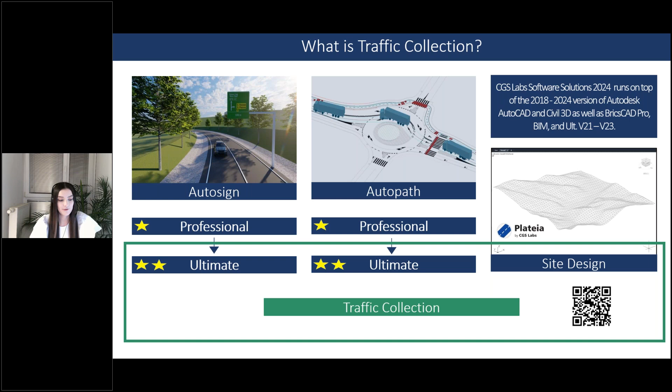First, we will take a look at site design. Site design includes quick site modeling features, earthwork calculations, utility design, and productivity tools to speed up project delivery. It is ideal for rapid conceptual projects, solution testing projects, detailed design, and earthwork projects, including volume calculations, grading, and more. Today, we don't have enough time to go through all the tools, so I will highlight only a few functionalities that I think are interesting for you.

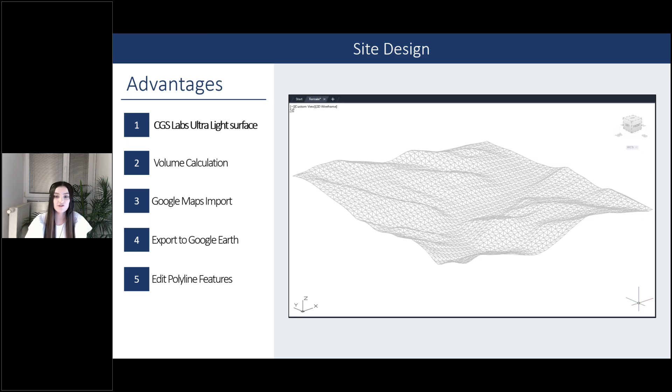So the first one is Ultralight Surface. This command allows us to create a digital terrain model based on points that takes up very little space, ensuring high performance in drawing, even when working on a large terrain. Then the next tool that greatly simplifies your work and saves you a lot of time is Google Maps Import, with which you can import a raster image and terrain with just a few clicks. So in the program, you run the Google Maps Import command and then write down the location. In our case, Wellington, and then we zoom in to find an appropriate area.

Okay, when we find the area, we can check the box on import raster and new surface, and click the plus button to define the surface name. Then we click OK, and after that we click import. It opens a new dialog box where you select the country and coordinate system and confirm by pressing OK. In the drawing, a surface and a raster image will appear, which are precise enough for conceptual projects.

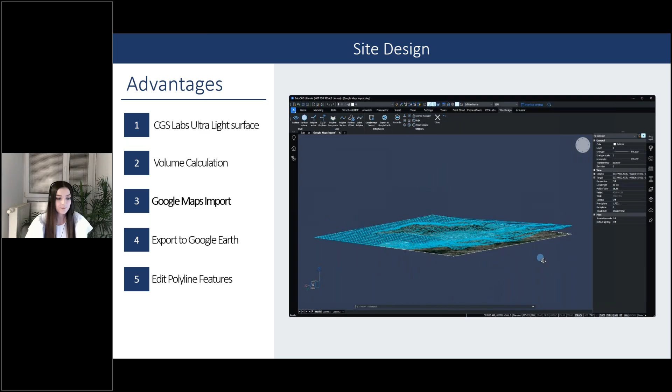Besides the Google Maps import, inside Site Design you can find another tool that is very similar in functionality, namely Export to Google Earth. This tool allows you to export your completed model directly to Google Earth, and then you can create nice visualizations.

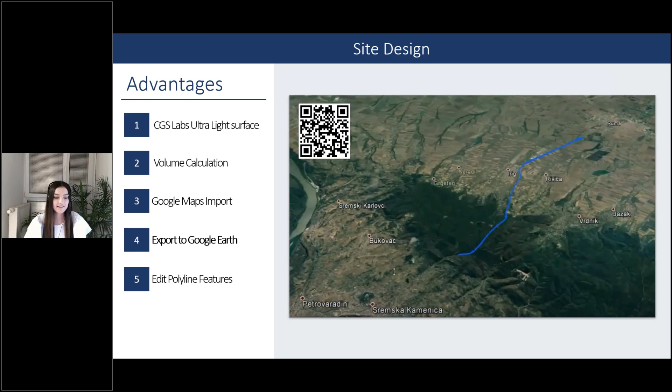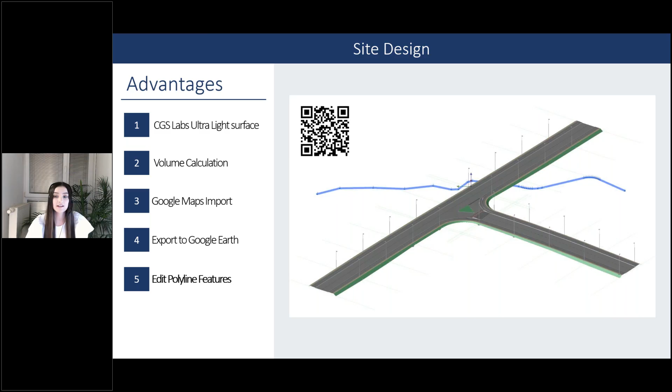In addition to these various tools for importing, exporting, editing surfaces, and calculating their volume, Site Design also offers a wide range of features for editing polylines. In the image, you have an example of how you can easily connect points into a polyline. Afterward, you can open this polyline, or any other 3D polyline, in the polyline editor and adjust its height. You also have the option to project it onto a surface, and these are very useful tools that can save you a lot of time.

The next program in the traffic collection suite is Autopath. Autopath is a professional software solution for vehicle swept path analysis used by civil engineers, transportation professionals, architects, and urban planners. Autopath enables the simulation and analysis of vehicle maneuvers, 3D vehicle animations, and more. With Autopath, you can also identify potential limitations in the design of garages. Additionally, it is used to simulate the transportation of goods on factory lanes, and it enables simulations of aircraft maneuvers to support the design of airport infrastructure.

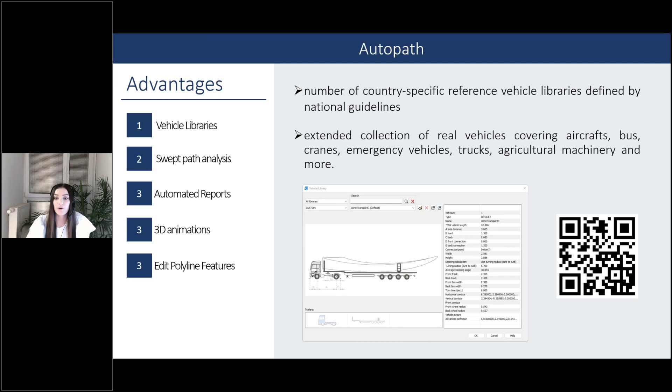However, there are many software providers on the market today. You may be wondering why Autopath software should be your top choice. The biggest advantage of this software is that it includes several country-specific reference vehicle libraries defined by national guidelines, and an extended collection of real vehicles covering aircraft, buses, trucks, trailers for wind turbine transport, cranes, emergency vehicles, and more. All these vehicles are available regardless of which version of the program you are using, whether Professional or Ultimate. In addition, you can also create your own custom vehicle, or you can send us the standard and we can create a vehicle library for you.

For each vehicle, you can use the horizontal and vertical analysis feature to simulate vehicle maneuvers and check transportability. You can compare one vehicle's path with another vehicle or with different built objects to create a comparison report. A significant advantage of the program is that all reports are automatically refreshed when we edit the path.

But that's not all Autopath can do. Last year we also introduced the option to create 3D vehicle models and the feature of 3D vehicle animation. Now you can generate a 3D animation based on any horizontal swept path analysis. All 3D models are automatically created even if the vehicle has custom defined values. The fact that the user doesn't have to manually create a 3D vehicle model gives Autopath a significant competitive advantage over other similar programs.

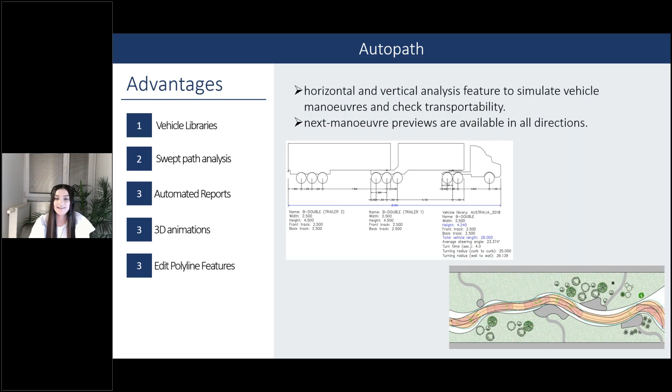In the first example, we will check the vehicle's transportability within the roundabout. To create a swept path analysis, we start by selecting a vehicle from the vehicle library. Autopath offers various options, including national libraries, special libraries based on manufacturer specifications, intralogistic and airport libraries, as well as a custom vehicle library. Today we will use a national library, and the Autopath program is localized for Australia and New Zealand, which means you can find all vehicles defined in your standards and technical specifications.

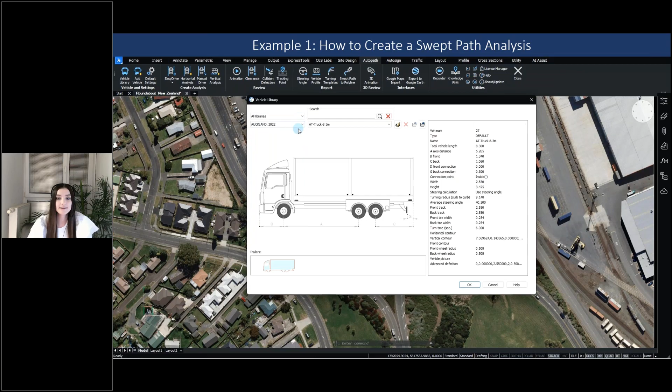Then we select the Auckland library and a car from the drop-down menu. Once we choose a vehicle, all its data will be displayed on the right side. Then you can confirm by clicking OK.

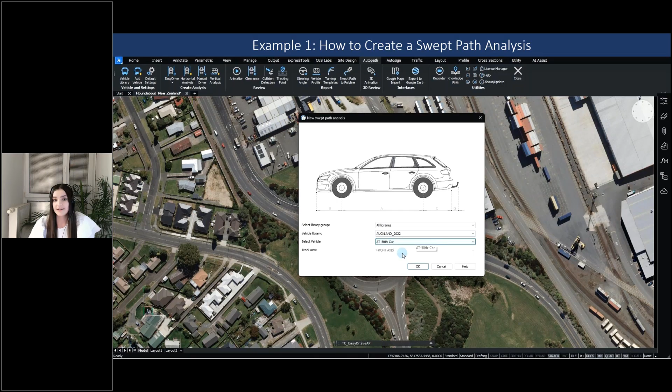I will now show you how to perform a horizontal analysis using two different methods. First, we will demonstrate the Easy Drive method. After running the Easy Drive command, a dialog box will appear displaying the vehicle selected from the library earlier. You can also modify the vehicle at this stage, but we will keep the current selection, so I will click OK at this point.

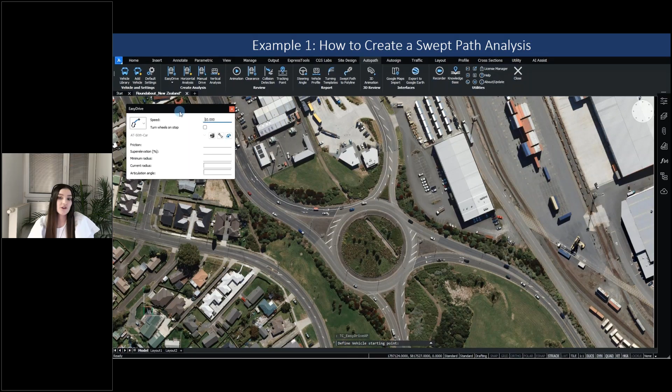Next, a new dialog box opens, allowing configuration of parameters such as speed, friction, super elevation, and minimum radius. For now, no specific parameters will be set, but we will define the vehicle's starting point and direction directly on the drawing. Then you can create the path by clicking the mouse to establish points outlining the vehicle's route, and while moving the mouse, you will also see a real-time preview of the vehicle's path.

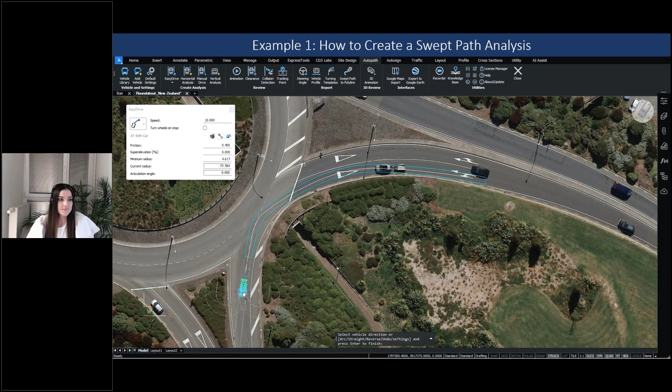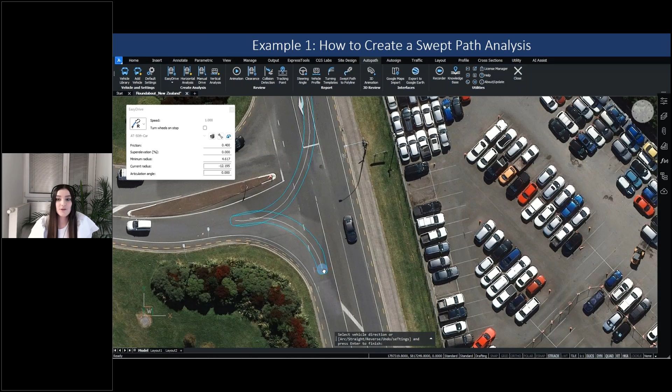Okay, so this is how we can continue drawing the vehicle's path. In this Easy Drive dialog box, we have on the left some additional options. For example, if you want the vehicle to go straight at a certain point, you can select straight from the menu, and then switch back to arc path. There is also another option called reverse, for reverse driving. If you find that you haven't defined the correct path, you can undo your actions by clicking the blue arrow in the box, or by using the keyboard shortcut Ctrl+Z. To finish the drawing, you simply click Enter.

For this analysis, we can quickly also generate a report. At this point, I will just open two views, and then run the steering angle command, choose an existing swept path, and specify the position where the report should be generated.

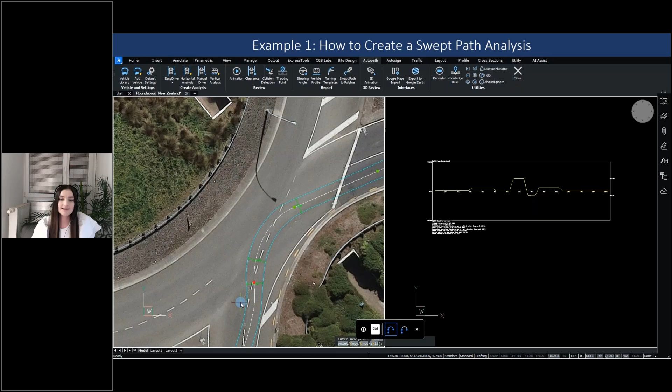If we need to edit the swept path, we can do so by adjusting the grips. For instance, you click on the vehicle axis and the grips will become visible. Next, click on the grip and move it to a different location. The program allows previewing the new path and automatically updates the swept path analysis and also measurements and other reports. So everything is automatically updated when we change the swept path analysis.

Another method to perform swept path analysis is the horizontal analysis. We run the horizontal analysis command, choose the vehicle from the list, and select the polyline in the drawing. The swept path analysis is then automatically created based on this polyline.

However, there is an important consideration to keep in mind with this method. Autopath allows the creation of horizontal analysis on any polyline. This means that a horizontal analysis can be created even on a polyline that represents an unrealistic vehicle path. Therefore, after using this command, you must check whether such an analysis is possible.

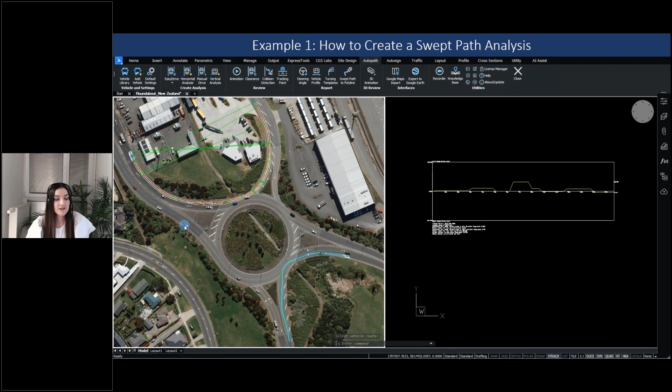You will find it easiest to understand if I draw a 2D polyline, for which I already know it's impossible for the truck to turn at such an angle. So I draw a polyline, then run the horizontal analysis. Then I select the vehicle and select the polyline in the drawing, and you can see that an analysis is created even if we know that in reality it is not possible.

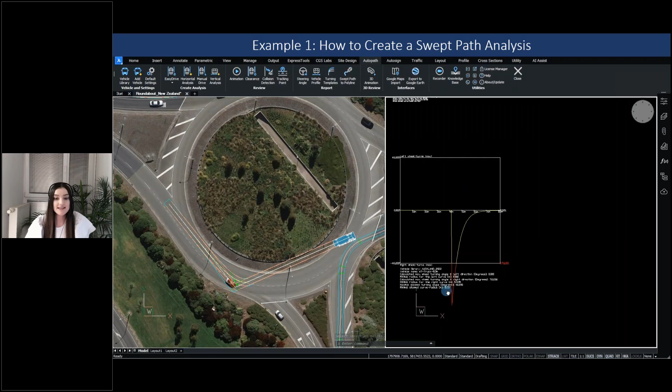However, if we now create a steering angle report for this analysis, you can see a red area which represents that the angle is bigger than possible for this vehicle. This area is also marked in the layout too.

So, to repeat, what is the main difference? When performing a swept path analysis with Easy Drive, it restricts unrealistic analysis. On the other hand, the horizontal analysis method always generates an analysis, but the report may indicate if it is actually possible.

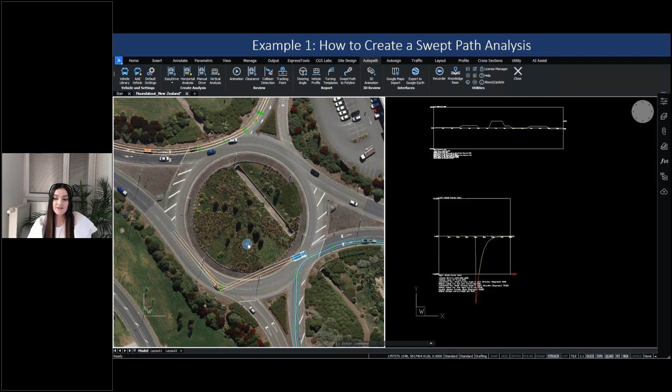In addition to horizontal analysis, Autopath also enables vertical analysis, primarily used for designing garages and ramps. For each of these analyses, you can create 2D or 3D animations and various reports. Besides, Autopath has numerous tools available for checking collisions with other elements in the drawing.

In addition to using vehicles from libraries, Autopath also allows us to create our own vehicles. So let's see how we can customize a vehicle. We open the vehicle library.

This time we look for the Australian library and we select the road train vehicle, to which we will add an additional trailer. To do this, we click on edit vehicle, enter a new name, and press OK.

A new dialog box opens where we have all the parameters for this vehicle on the right side, which we can also change. Then there are additional settings where you can modify the vehicle's contours, which will be used to generate a 3D preview of the vehicle. Right now you can see a 3D preview of the vehicle inside the drawing.

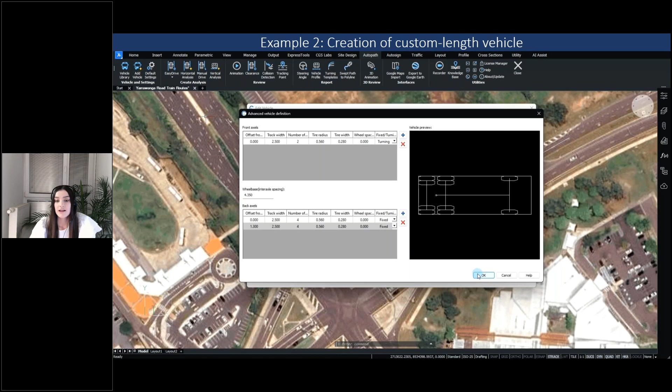Okay, but now I will close it. Finally, there is another icon for advanced vehicle definition, where you can adjust the parameters for the front and rear axles. Here, I would like to bring your attention to one more thing.

If you select a trailer, the data for the trailer will be displayed on the right, and the same goes for contours and the preview. So the part of the vehicle that you click on is the one that you are editing.

Now let's add one more trailer to this vehicle, and after confirming this trailer by clicking OK, this custom-made vehicle is saved in our library. Next, we will run the horizontal analysis command.

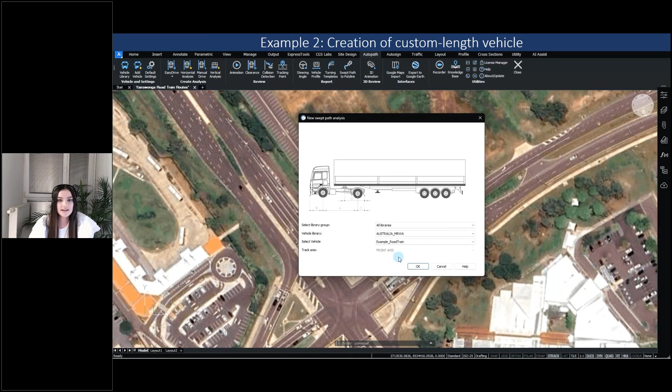Select this vehicle and select a polyline in the drawing. For this analysis, we will then also create a 3D animation. So even though the vehicle is custom made, we can easily create a 3D animation.

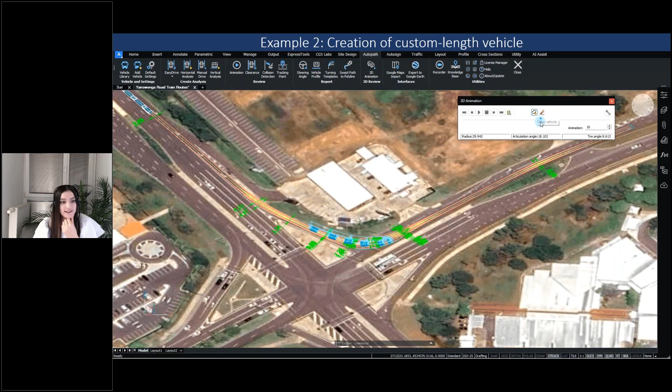In this 3D animation dialog box, we have commands available for playing the animation. In addition, we also have an option to create a 3D model of the vehicle or its trace on a particular section. So here at this point, I stopped the animation and created a 3D model of this vehicle.

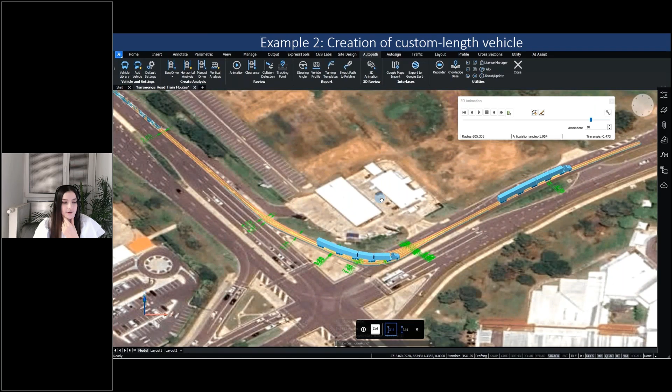If you want a better view of the model, you can switch to realistic. And right now you can see two 3D models of this vehicle.

Now let's take a look at the last program in the traffic collection: AutoSign. AutoSign is a professional software solution for planning traffic signs and road markings in both urban and interurban road infrastructure, redesigning the traffic flow or implementing new practical solutions to any problem that traffic engineers may face. It also provides tools to design details of parking facilities such as delimitation lines, vertical signaling, height control gantries, and more. Besides, it is also used for warehouse traffic design and management, for cycle path networks, ski resorts, and others.

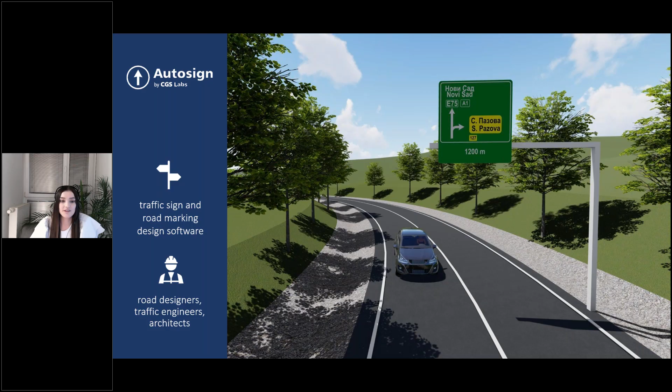The advantage of AutoSign is that it includes an extensive collection of country-specific traffic sign libraries, road markings, traffic lights, and other street furniture elements. Users also have the advanced option to include their own traffic sign blocks into a customized library in AutoSign and employ them in design with the same features that the predefined libraries possess.

The biggest competitive advantage over other similar programs is definitely the creation of a 3D model. You will see that it only takes one extra click to create a 3D model of traffic signs, road markings, and gantries based on a 2D design. Besides, AutoSign also has tools for attaching attributes and IFC export and import, which allows you to collaborate with other experts on demanding BIM projects.

We will now look at how the AutoSign program works in practice through 2 examples. In the first example, we will learn how to create a temporary traffic management plan where we will insert traffic signs and cones and then project them onto the surface to obtain a 3D model.

So first, we always select the library of traffic signs. We run the library manager command and choose the New Zealand library. If you don't see the library on this list, you can click download libraries and download it to your computer. All these available libraries are designed according to the standards.

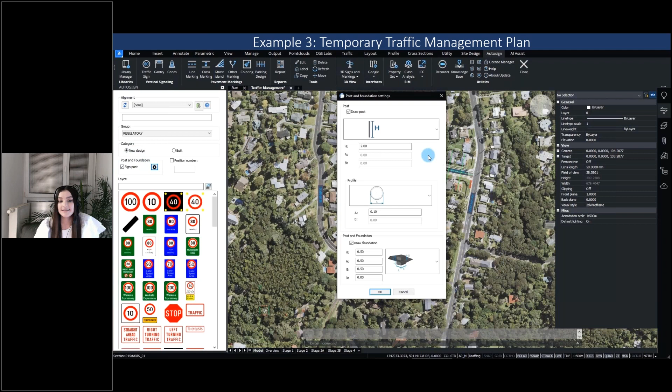Then from the list we select a group, and check the box next to new design because we are planning a new traffic sign. Next, we click on Settings, where we define the dimensions of the post and foundation. Since we will insert a regular speed limit sign, these values are fine and we can close this window.

Now we just need to select a traffic sign. AutoSign currently offers 3 different types of traffic signs: the first type consists of traffic signs based on national regulations that cannot be edited; the second type includes traffic signs based on national standards that can be edited; and the third type comprises custom traffic signs designed by the user.

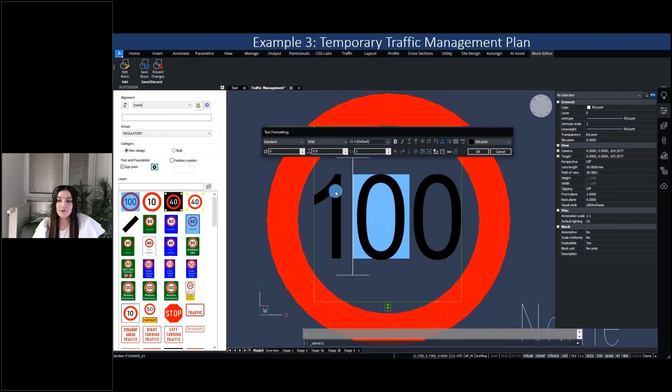Today we will be using signs with editable text, identifiable by the suffix 'temp' in their name. We select a traffic sign and define its position in the layout by clicking, defining the angle, and once the position is defined, the traffic sign editor allows you to customize the text, edit the content and properties, and specify the text position within the sign.

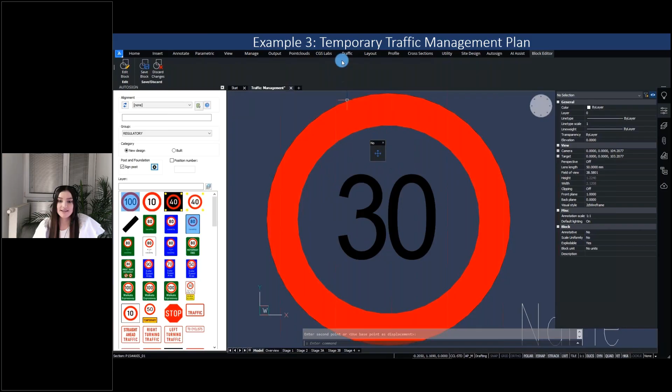In this step, you can also modify colors or any other aspects of the sign if needed. When you have finished customizing, you click the Save Block button to insert the customized sign into the layout. At this point, AutoSign takes you back to the layout where the 2D traffic sign already includes all the changes.

However, in this case, as we are planning a road closure, we want to place 2 traffic signs on a single post. We will achieve this by first drawing an additional traffic sign in the drawing and then transferring it to the existing one.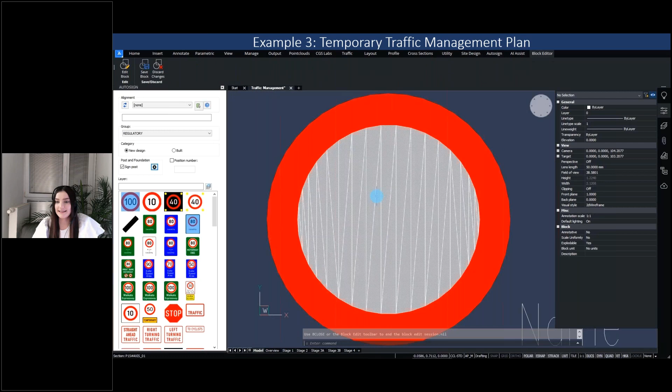First, let's insert the second traffic sign. The location of that traffic sign is not important because we will delete it later. So we set a new speed limit, then we change it and move it to the middle.

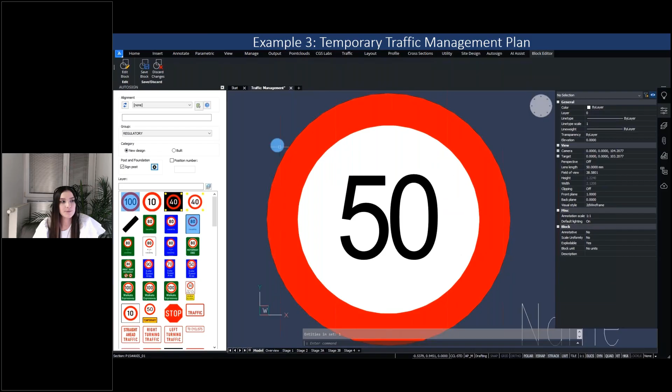And after we finished, we click Save Block. Then this second traffic sign is inserted in the drawing. Now we can run the edit command and click on the first traffic sign, then use the add from drawing icon to add the second traffic sign. If we click OK, 2 traffic signs are now present on the post, positioned one above the other.

However, because we want the second traffic sign to be rotated 180 degrees, we click Edit once again.

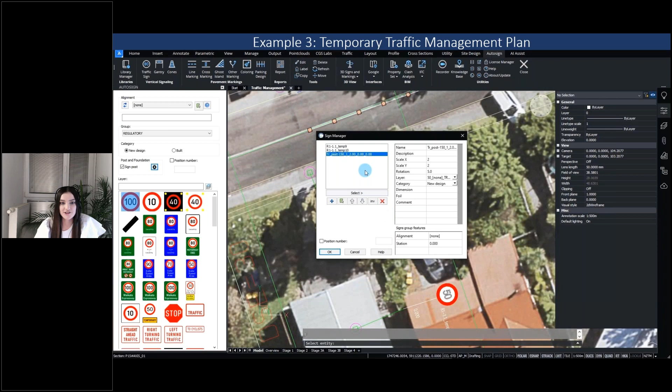And then we adjust the rotation. We do this by checking the rotation of the first line, then adding 3.14 to the second one, since that is the value in radians.

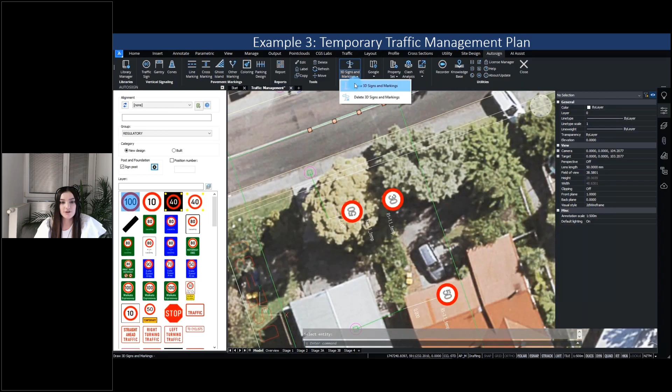Okay, so now we have a traffic sign in 2D, and now we run the Draw 3D Signs and Markings command. If we move to the 3D view, you will see that the traffic sign is automatically created as a 3D model. So basically, with one click, we transform a 2D traffic sign into a 3D one.

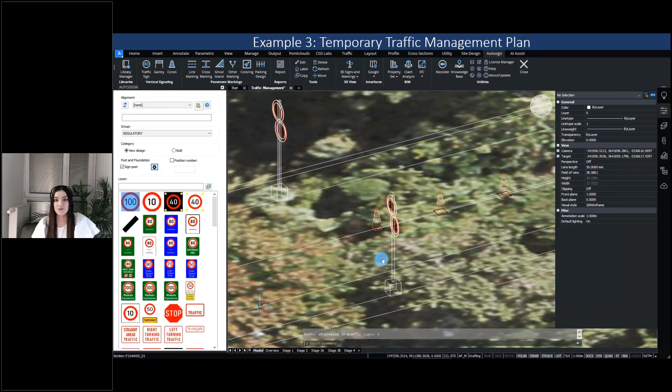Then a very important aspect of the temporary traffic management plan is the design of cones. This task is made straightforward with the AutoSign program. So if we go back to the layout now, and close this box, we can activate the cones command.

Then we select a cone type from the drop-down menu, and next in the drawing we choose a 2D polyline along which the elements will be drawn, and then specify the interval. Afterwards, we click on additional settings, select the surface, and click project elements.

Okay, so now you can see that cones are created, and if we move in 3D, you can see that they are also created as 3D models.

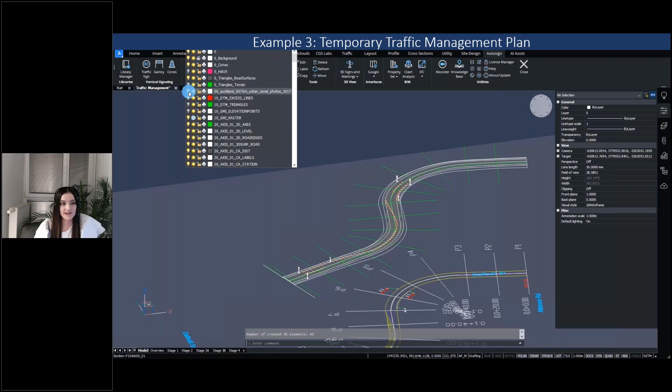And specifically in this model, I also added traffic lights. Through this example, you can see that working with the AutoSign program is very straightforward, and in just a few minutes, you can create a really beautiful 3D model of a road closure.

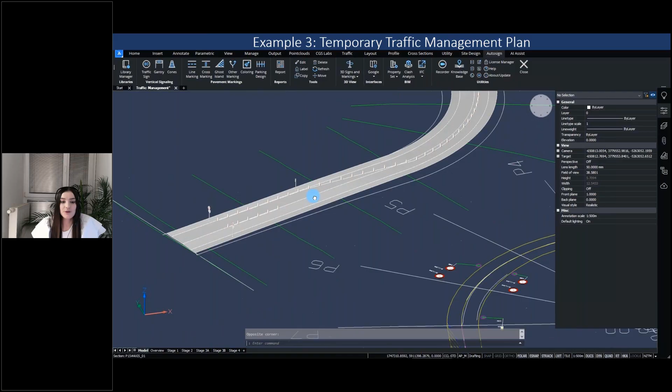And you can then show this model maybe to the client and to the wider public, making it easier for them to visualize how certain solutions look in reality.

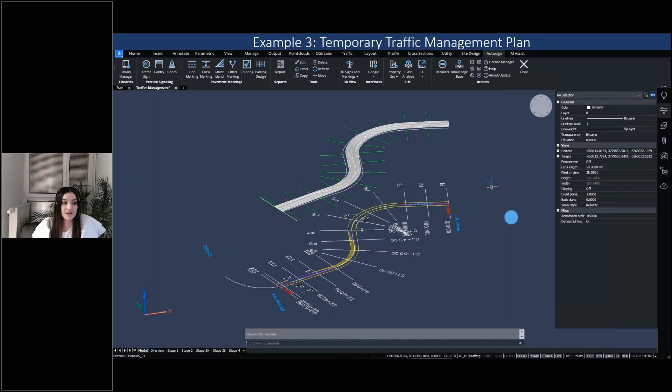And now let's see how we can use the AutoSign program for parking lot design with the help of different tools for creating road markings. We will now complete this drawing.

And since we have the surface of this parking lot in the drawing, we will project all the road markings onto it, and then at the end obtain a beautiful 3D model.

So first, in the library manager, we select the library for New Zealand. I click the library manager command, then the icon next to the road markings, and select the New Zealand library, click OK, and once again.

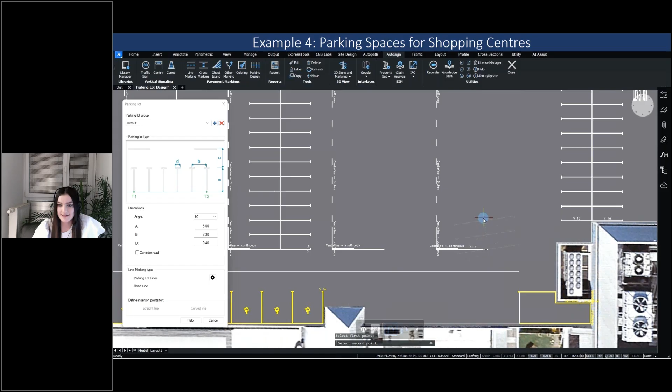Okay, then I run the parking design command and specify the dimensions of parking spaces, click straight line, and define the location of the first parking space. You can see that a preview of parking spaces appears in the drawing.

So with the mouse, you define the second point, and then you specify the size of parking spaces. If you move the mouse more to the left, only parking spaces on the left will be drawn. If you move to the right, only on the right. And if you click somewhere in the middle, parking spaces will be drawn on both sides.

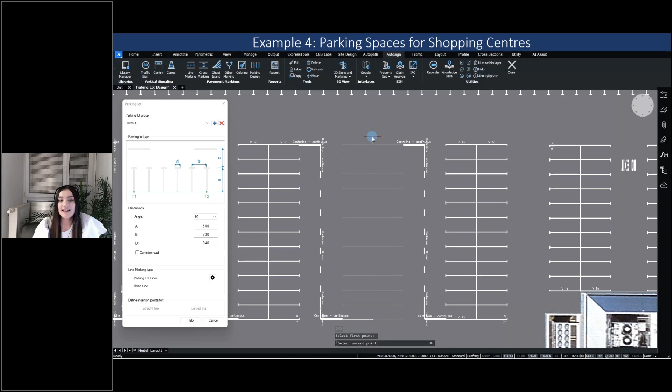And when you want to draw new parking spaces, you simply click the straight line icon again, and then specify the location of parking spaces in the drawing. You also have the option for a curved line.

And when you're drawing parking spaces in a curve, you need to specify an additional parameter, the arc bulge.

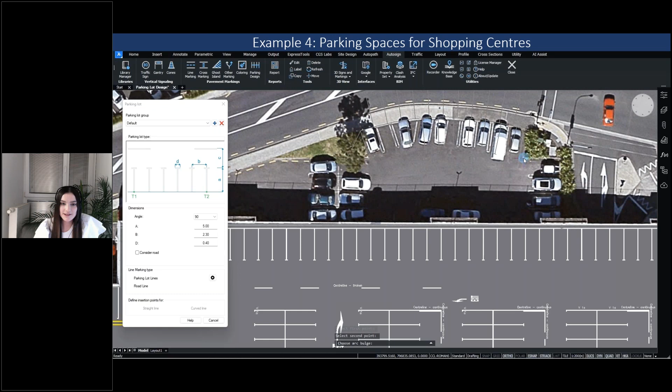But okay, because we don't want these curved parking spaces in the drawing today, we can simply select them and delete.

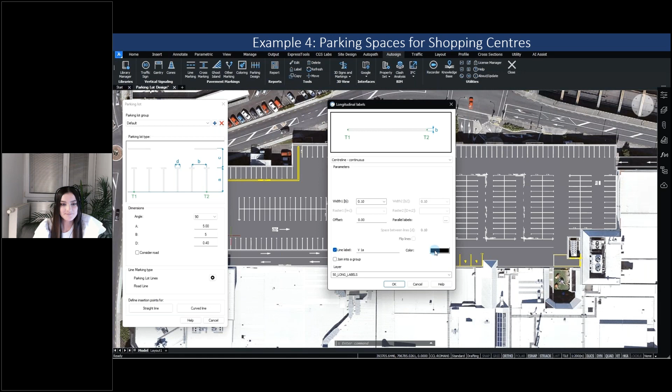Okay, and now let's draw some wider parking spaces with yellow lines. In the dimensions section, change the width and then click settings to change the line marking type. We will only change the color, but you can also change other parameters. Then you click straight line once again and draw those yellow parking spaces.

Then the next tool we will use is line marking. You run the command and then select a polyline in the drawing along which you want to draw road markings. From the drop-down menu, you choose the line type and then define other parameters. In our case, we will change the color and click OK, and the line marking will be drawn.

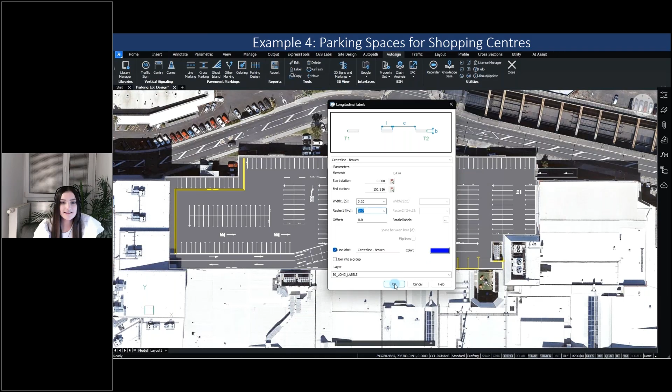If you want to edit it, you can simply click Edit, select it, for example, and change the color of the marking.

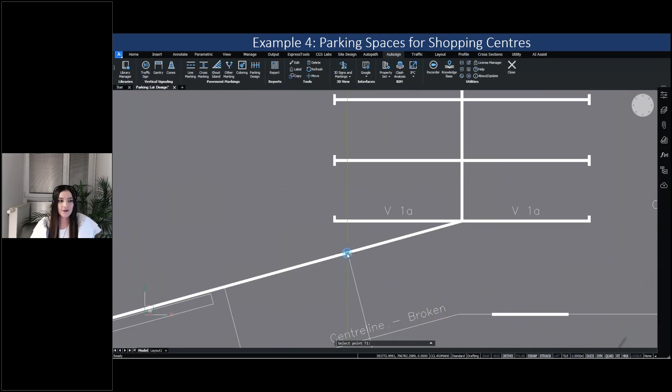Then the next road marking we will draw is a pedestrian crossing. Run the cross marking command and then choose pedestrian crossing from the list. The dialog box also displays a sketch that shows you the sequence of points you need to specify in the drawing.

So you define those four points directly in the drawing, and based on them, this pedestrian crossing will be created. Okay, and then the next functionality is Ghost Island. You run the command and first select the boundary, so this yellow polyline will be the boundary.

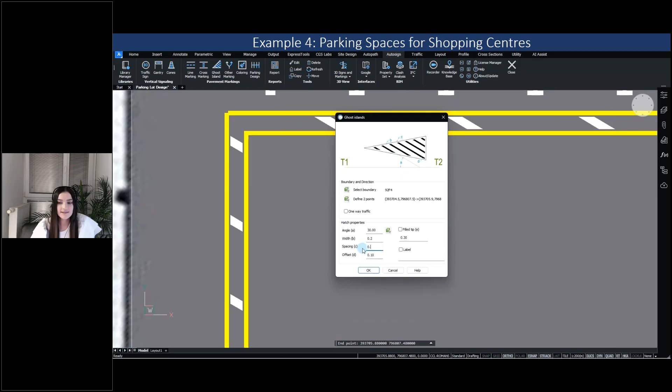And then you define the direction by defining 2 points in the drawing. In the lower part of the dialog, you set some other parameters such as spacing and width. And after you click OK, you will see new markings drawn inside this yellow frame.

One more tool is coloring, which allows you to color certain areas in the drawing. So I selected closed polyline, I changed the color, and then the hatch was drawn based on the input data.

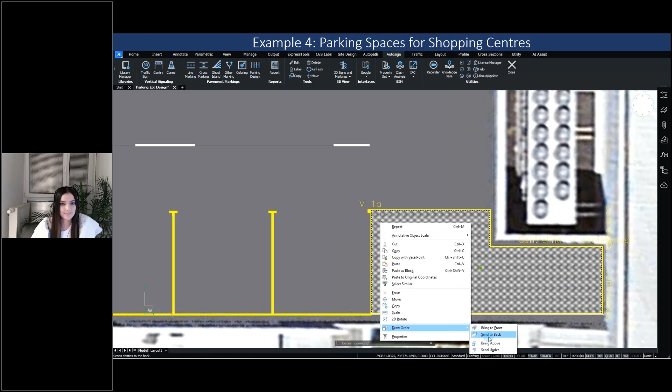Finally we have the other marking tool, and this opens a library of all markings based on the library you have selected in the library manager, which in our case is New Zealand. In this list, I select one marking, for example, and then place it somewhere in the drawing.

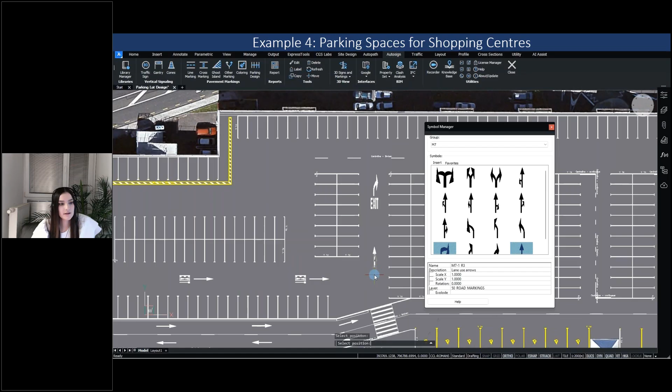Now when we have drawn all road markings, we can also create a report.

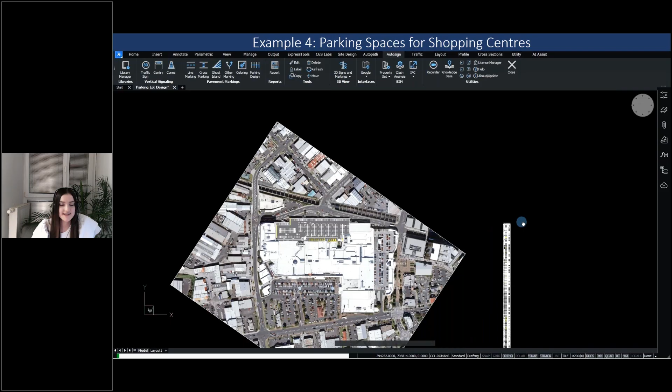At the top, you select the report type, and below you specify table settings. Then you define the insertion point for this table in the drawing. And when you zoom in, you will see that the table displays line type, marking sketch, dimensions, color, amount, area, and some additional comments if you have any.

Additionally, this table can also be generated in an Excel file.

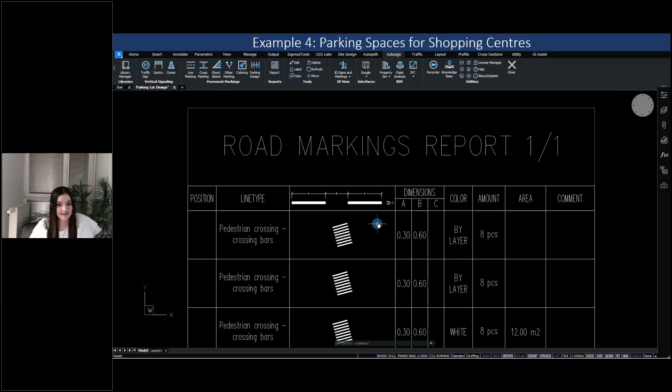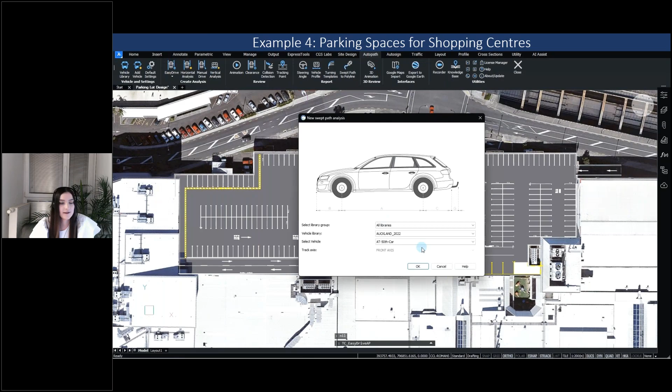So if we go back to the layout, we can now use Autopath to perform a swept path analysis. I run the EasyDrive command, and I perform a swept path analysis for one car.

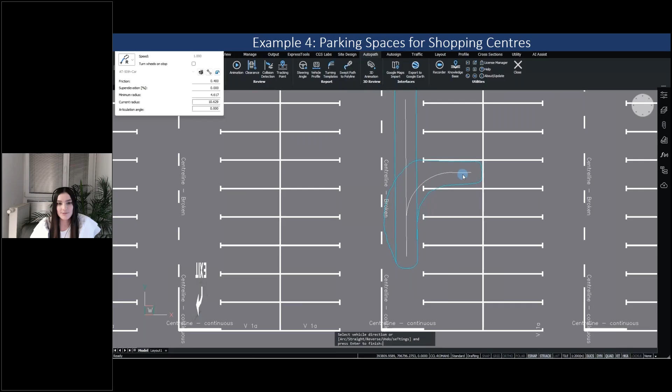And this is the way how I can check if the car can park in a specific parking place.

And if you want, you can also create 2D or 3D animation of these vehicles. I think this is proof that you can easily combine both software solutions if you have this traffic collection package.

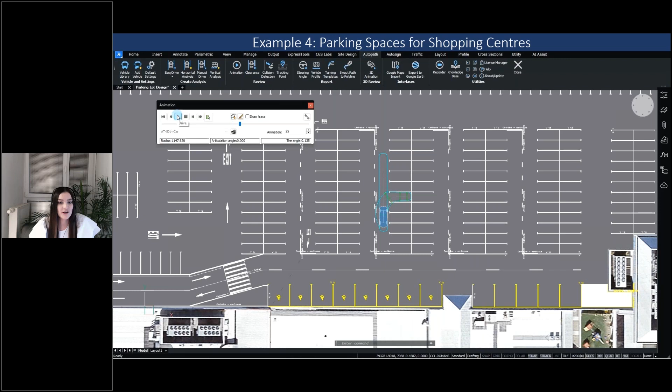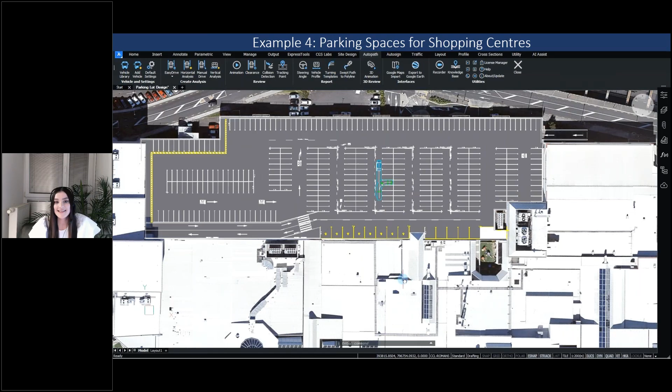Now let's explore one of the best features of the AutoSign software: the easy creation of a 3D model. So I switch to a 3D view, and you can see that we have a 3D model of a shopping center and the parking lot surface.

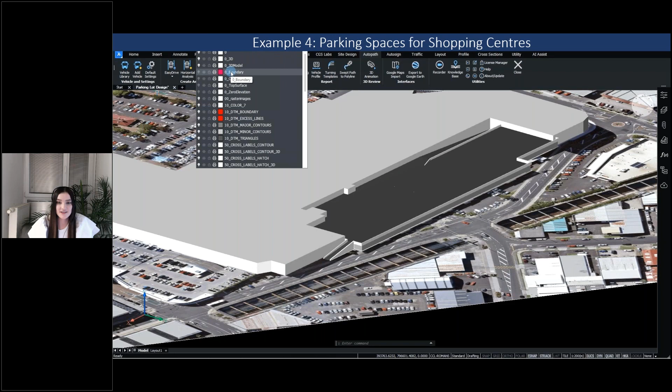I will also hide the raster image so you will see the model better. And if I go back to the AutoSign software, and if I draw those, and run the Draw 3D Signs and Marking command, you can project those road markings onto the surface.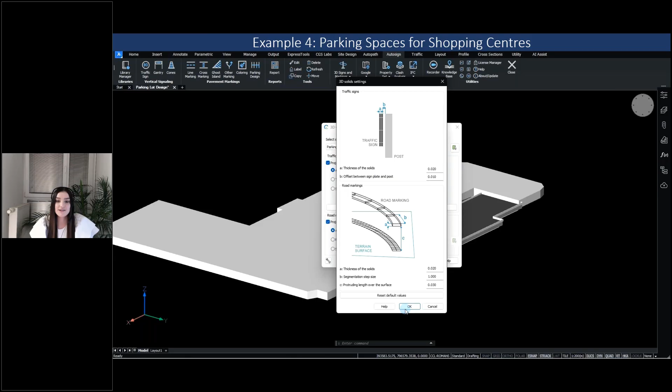You also have some additional settings where you can set the thickness of the road marking and the segmentation step size, which defines how accurately the road markings will be drawn in a curve. Once I confirm the parameters, AutoSign creates 3D models of all the markings in the drawing.

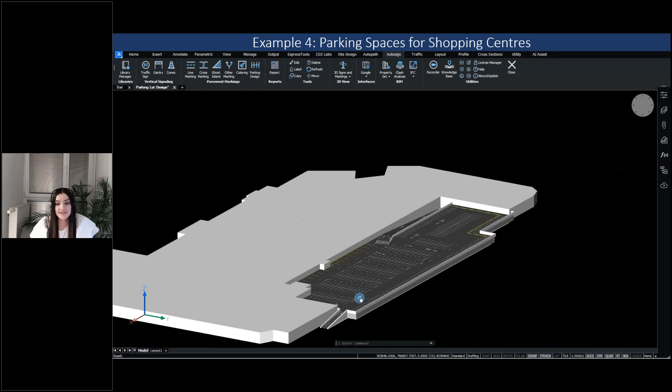I think that creating 3D models in the AutoSign program is really straightforward, and you can achieve wonderful results very quickly. You can see I created those 2D road markings very quickly, and then basically with one click I transform them from 2D to 3D.